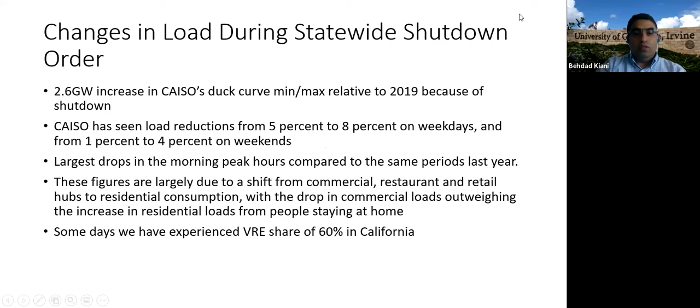And as I told you, it goes up to some days to 60%. So we might look at this in the future.

So today's presentation is about how we can actually provide sufficient seasonal storage to achieve a 100% zero carbon electricity grid, which is our 2045 goal in California. And what would be the potential role of hydrogen infrastructure in a BEV-FCV combination for a sustainable path towards a zero emission energy system? And what could be the role of hydrogen infrastructure in seasonal storage for balancing variable renewable energy generation and vehicle hydrogen demand year-round?

So what I have been developing up to now was a model, I call it CALZEEV because we call it a California Zero Emission Energy System and Vehicle. At an early stage, it was only a Cal EV model because we were looking at only the EV vehicles, BEVs. But later we added ZEVs, that means all the hydrogen FCV vehicles and BEVs. And another E in the middle, that's an energy system, because we are adding different sectors of the economy, not only the transportation sector, but also going up to industry and other sectors.

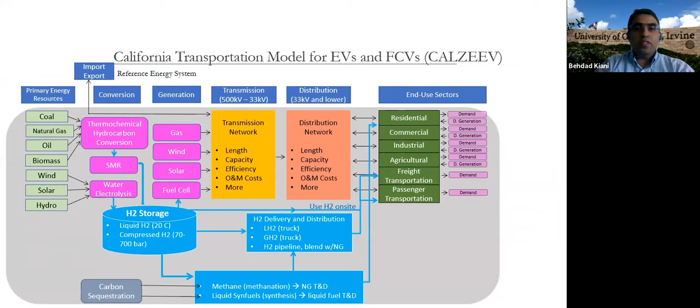So this is a typical reference energy system for the model. You see that we can look at the energy chain from the supply, all the way from the resources to the generation, power plants going into the transmission network, and from the transmission to distribution, and from distribution to the end use sectors. Now, at the end use sectors, which you see in green, MESSAGE is designed so that we can look into the demand, and that's hourly demand of useful energy.

That means for transportation, the service we need is the VMT, the hourly VMT we need for each region for people to travel. And if it's residential, it could be heat demand or cooling demand. And if it's industrial, the demand for heating or direct reduction for steel and iron. So it looks at how much energy you need, and it tries to provide that energy through all these technologies from end use sectors to the conversion level.

And beside the electricity system, below in blue is the hydrogen infrastructure. So if we have electrolysis-made hydrogen from renewables or from the grid, it goes into a storage tank and is delivered to distribution for fuel stations, or goes to the industry sector to provide hydrogen for steel, which we added in this model. And I will explain this model further when we show the results.

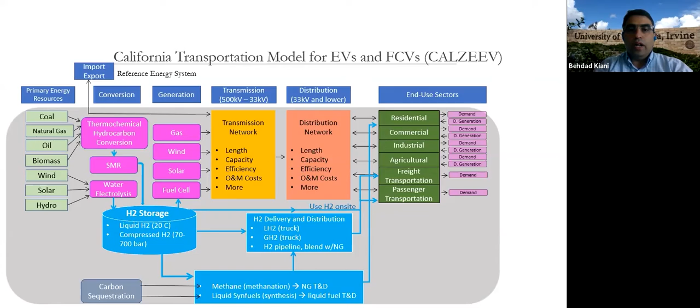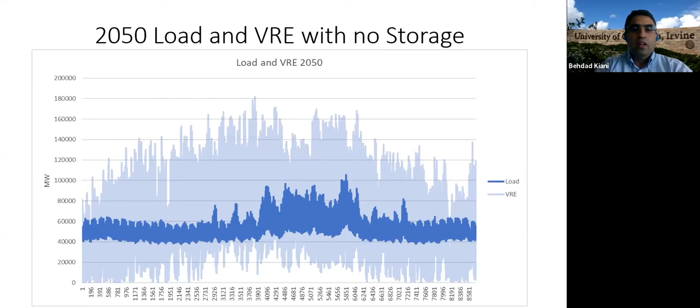So here is a sample simulation for 2050. It's just a simulation where we had enough variable renewable energy, that's solar and wind, that the total energy in a year equals the total demand for that year. This is what it would look like in 2050 with all the intermittency that we see in this figure. And if I open some days for you, you see that the VRE and load really mismatch at different times of the year, especially summer and winter.

So for the 100-something hours of the simulation in summer, you see that the orange is the VRE and the blue is the load, but the total VRE is much more than the load that we need. But in the winter, for a few days, you can see that orange is much lower than the load. So what you need is to take all that excess renewable energy from summer and carry it all the way to the winter times when you lack renewable energy.

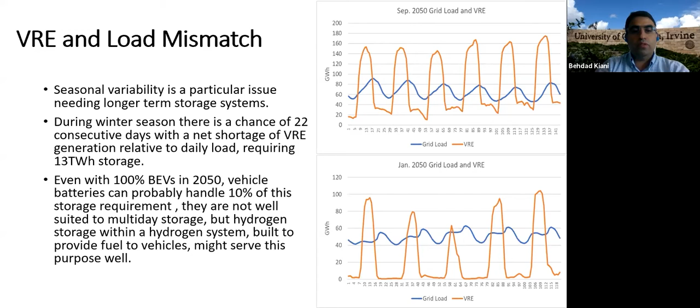And with a simple simulation, you can see that you might have even 22 consecutive days of net shortage of VRE in this case. That would be about 13 terawatt hours of storage needed only for these days. And even if 100% of your vehicles in California are BEVs, that's about 28 million vehicles, and you use their batteries for grid interaction, this would probably only handle 10% of the storage requirement. So they are not well suited for multi-day storage, but hydrogen storage with a hydrogen system built to provide fuel to vehicles might serve this purpose very well. So that's why we added the hydrogen infrastructure to our all-BEV scenarios.

So our main goal and objective is to add all the sectors, although we haven't gone through all of them, residential and commercial. But for now, we added the industry sector beside the transportation sector, to study the detailed hydrogen infrastructure for the 5 regions in California based on transportation energy demand for each region. But I have to mention that for now I had some CPU limitations, so I ran the model with fewer regions.

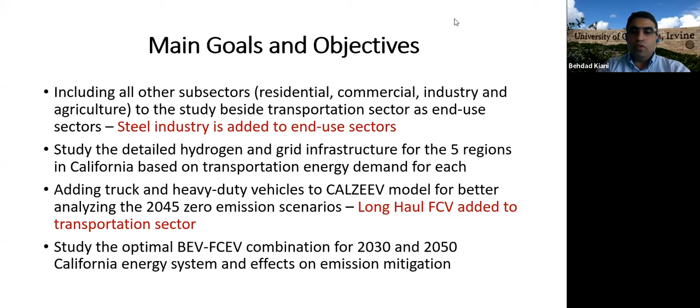And then adding trucks and heavy duty vehicles to the CALZEEV model for better analyzing the 2045 zero emission scenario. So for this purpose, beside the FCV LDVs and BEV LDVs, I added long haul FCVs and long haul BEVs as well to the transportation sector. And I went through different scenarios of BEV and FCV combinations, specifically for 2045 for this presentation. So this is a model development for 2045.

What did you do for the demand for 2045, for example? So for demand for 2045, I have the demand for the transportation sector based on my scenarios. I have 3 scenarios here, 100% BEV or 100% FCV fleet, or 50-50 as a mid scenario. So when I want to find a load for 2045, I have some information about the load I need for my BEV fleet and FCV fleet, if any.

And then I have other loads, not including BEV charging, but including other sectors of the economy. That's based on the CEC forecast up to 2030, extended to 2045 for other sectors of the economy. So I have some other load in my simulations that represents those. And I have my own fleet and VMT that provides me an endogenous final energy hourly load that I need for my BEV charging.

So yeah, California electricity grid, we went to 90% of VRE for 2045 for now. I'll explain why 100% would be more challenging, because it's more important to see how we want to go from 90 to 100% and keep the prices as economically optimum as possible.

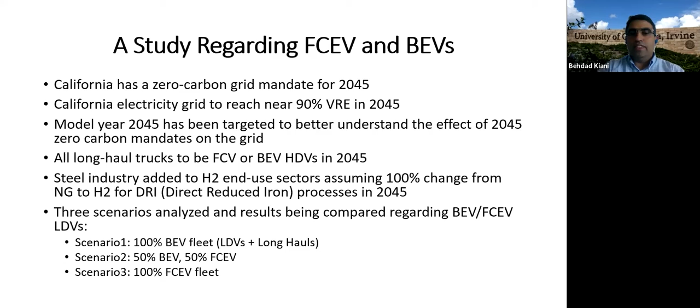So adding new sectors, the long haul trucks, how I incorporated this sector into the model. My assumption was based on simulations done by other groups, like 250,000 FCV long haul trucks in 2045. Assuming each long haul truck goes 100,000 VMT per year, has a 60 kilogram hydrogen tank, and that in 2045 I can achieve 11.3 miles per kilogram hydrogen fuel efficiency for my long hauls. And the steel industry consumption is 3 million tons per year that we use for the hydrogen consumption.

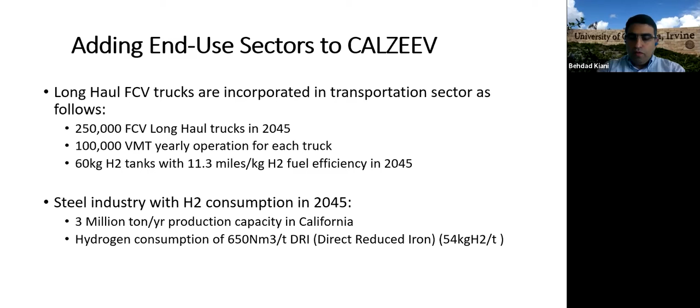For DRI, 54 kilograms of hydrogen are required for each ton of steel production. I added this to the demand sector. On the right hand, you can see I added the long haul trucks, the BEVs, the FCV light duty, and in the upper right corner is the steel industry, which were all added to the demand side of the model, and I had hourly demand for that.

One thing that the model can give you as an endogenous variable is the shadow prices. It is a demand-driven optimization model, and it looks at the total cost of the energy system, calculating the present value of the cost of all the technologies that can be installed in future periods as well. That means if we want to install hydrogen storage, a hydrogen pipeline, or a hydrogen fuel station, or on the electric side fast chargers, it takes all the information such as capital cost, fixed operation and maintenance cost, variable O&M cost, plant factor, lifetime of the plants, efficiency, and so on.

So it provides, based on the demand, how much should be installed in each year or each period, and within 8760 hours, how it's optimizing the activity of the technologies. So potentially this is a tremendous amount of data. Where did you get all this information, especially information that pertains to the technical characteristics of each plant?

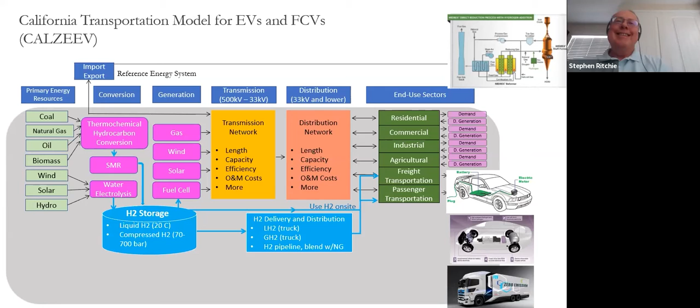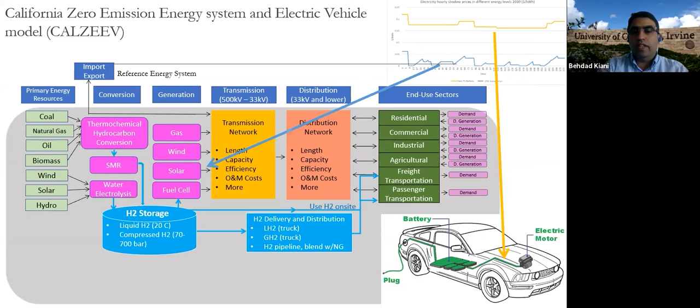Okay, so what is the actual output of the model? So the actual output of the model, I'm just going to go to it. Okay, sorry. Yeah, one of the outputs is the price, it's a shadow price. You can get the average shadow price for each part of the energy system. So this is a sample output for each hour. You can get it from the output of variable renewable energy, solar and wind, or you can get it from inside the car, where the electricity is going after being charged from the battery to the motor. So it's very flexible how you design a model, how much you go inside each technology, and for each part of that model, you can get the shadow price.

Another thing is that I added the electrolysis plants, so the model can decide if it's going to get it from VRE only, which is green hydrogen, or from the gas power plant to the grid and grid to hydrogen, which is including the VRE up to 90%. And this is like gray hydrogen, but if we add carbon capture and sequestration to the gas power plant, it would become blue hydrogen. So because it's a 90% grid, I showed it as blue, but that's something else that we are going to add to the model.

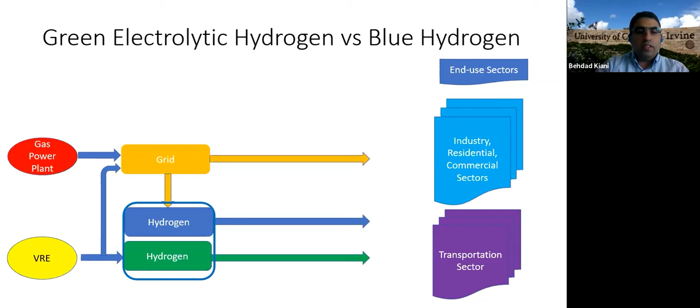So I showed you these curves, and I want to show you some results as Steve asked me. Some of the results are how much capacity is needed for each technology. When I say technology, it's not only the power plants, it's all the technology within the energy levels of that picture I showed you. That means the storage tank, the pipeline, the electrolysis plants, the fast chargers on the demand side, or how much capacity we need for hydrogen fuel stations to provide the H2 dispensing capacity needed for all those VMT FCVs that would be available for 2045.

So the output of the model is many things. First, how much optimum capacity of each technology we need, and beside that, I'm showing the hourly output as well. Prices are an endogenous hourly output, but I'll show you in the next slides how I go into the hourly production of the thermal plants and how much is actually produced by electrolysis plants and so on. So in this scenario, that is a 50-50 FCV BEV scenario for 2045.

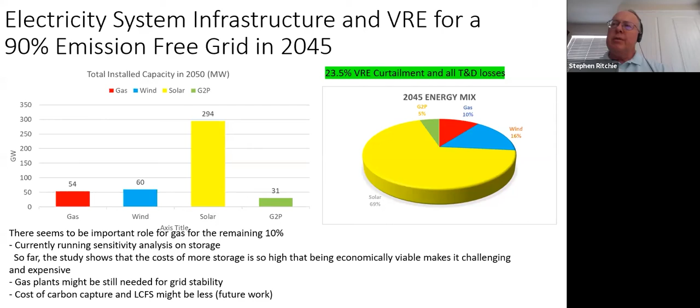So, Behdad, when you talk about transmission and distribution, you've got one huge region for Northern California. Is it essentially aggregated into a single representation for that whole region? So we have distributed the regions. If I go back to the first one, I have shown on the lines, it's very small, what the capacities are for the lines between big regions. It might be about 3 gigawatt capacity.

So when I say I have 62 gigawatts of peak load, that 62 gigawatts is actually distributed between these capacity lines, and could be like 24 gigawatts between two regions, 10 gigawatts between other two regions. But with the peak load, you might have in total a peak load of 64 gigawatts for 2017.

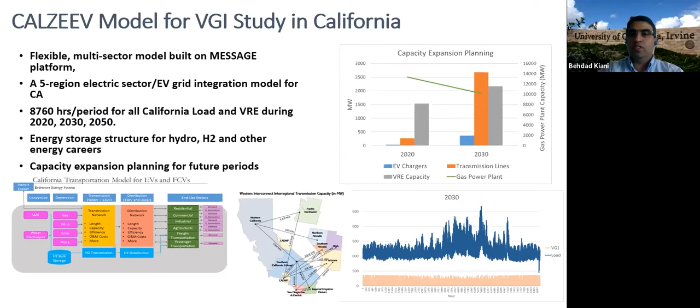That's how I'm actually now modeling, but going into more detail gives me more precise information regarding the transmission and distribution, of course. Okay. So maybe this is what you're looking at in the future, but that huge Northern California region has a number of cities, right? It's got the Bay Area, Sacramento, and some smaller but still significant sized cities, maybe Central Valley. Is it practical? Maybe it's a computational question, but is it practical to disaggregate that region further, maybe by urban, rural, and the larger cities, or does it just blow up the CPU time?

Well, I think we have to look at what our goal is for each one. This is a very aggregated run for the whole 5 regions as one. But if I want to go into one region and look inside that, then maybe I can divide that single region into another 10 regions and run it for that region, and run the whole 5 regions in a model like this. I see. There are things that we have to look at. I mean, it's CPU time, the computer and the limitations. If you want to have all the 8760 hours and all those technologies, hydrogen and electricity grid, and all those subsectors, there are some CPU and hardware limitations that we want to avoid.

I know that there are some models like Energy Pathways, E3. They are not looking at 8760, but they're looking at 24 hours for each month. So they have 24 times 12 time slices for each year. That enhances the computing time, but that limits how we look at the real thing in the future, the wind and solar and charging BEVs for the 8760, looking at all the capacity to be installed in a year. They wouldn't be able to show that as detailed as we are able to show it like this. I see. And so what's the runtime of the model roughly at the moment for the state?

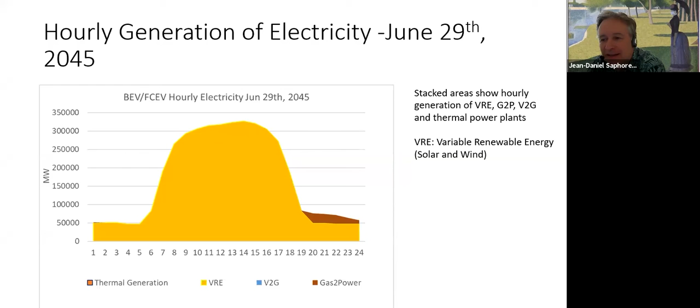Yeah, of course, the quality enhances. You can get more specific, more quality results for each distributed region within each city, or how the power plants. But for now, I'm looking at the whole California ISO CAISO grid and what would be the effect of power plants on the grid, right? So I didn't go into the details for that reason. I thought it wouldn't be necessary for the purpose of looking at the transportation sector specifically and how they can affect the grid. Thank you.

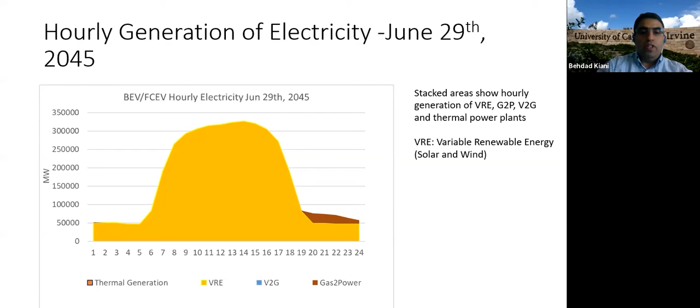You're welcome. So a typical day that I have figured out for 2045 is June 29th. This is the VRE production in that day. And dark brown is the gas to power, which the model has chosen. There's no thermal generation in that day, and there's no V2G required. The stacked bars are the load in that day. Now, you see a lot of solar is wasted and curtailed.

The reason is because there's a trade-off between how much hydrogen infrastructure you want to install to avoid curtailment because of the cheap solar you have in that year. So the model has decided to install a certain, specific amount of storage and pipeline, but to curtail this much of solar energy to keep the costs as low as possible. So that's up to 90% VRE in the grid.

The grid load is shown on the lower level. The red part is the electrolysis from grid, and dark blue is the electrolysis directly from VRE, which is green hydrogen. And you see there is some grid to vehicles also, getting electricity from grid to charge the vehicles.

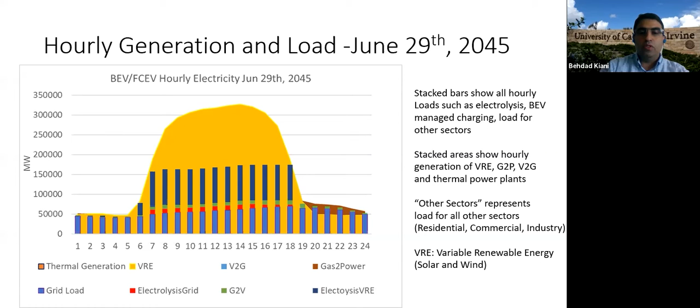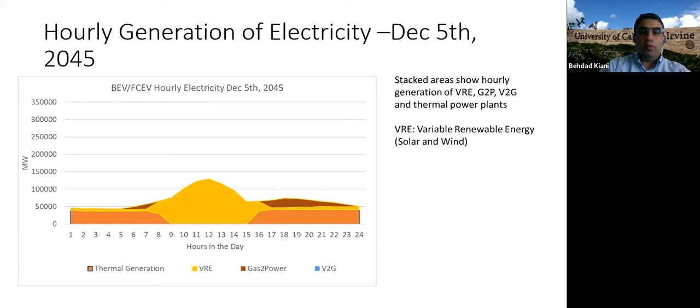Another day is a winter day. We have much less solar, so we need to have some thermal generation. Although we had hydrogen storage and infrastructure and G2P, it's cheaper to have the thermal generation, like gas power plants. And on top of it, we have some gas to power, but not all of it.

You know, I have another quick question for you. Yes. So you split California into several regions, right? Are you modeling the fact that we are part of the Western grid and that we can export some of the extra power we are generating to other parts of the Western grid that may actually need it? Because we are a couple of hours behind some other parts of the Western grid. So it may be dark there, we have a lot of sun, we can send them power, right? Or in this exercise, this is not done at this point.

Yeah, exactly. That's a very good question. Actually, I was looking at that when I was doing work at British Columbia, and we were looking at the WECC region and how we can use the time difference in utilizing the storage. That's a very good thing to add to the model in the future steps. But now, no, I didn't include that time difference and the export opportunities that we would have.

You know, likewise for imports, right? We could import power when needed. So that's the whole reason for being interconnected. Exactly. So the model can choose the import based on the price of electricity or even hydrogen. And for the export, you have to expand your region to include the WECC regions to see how it actually trades the energy between the regions. Thank you. You're welcome.

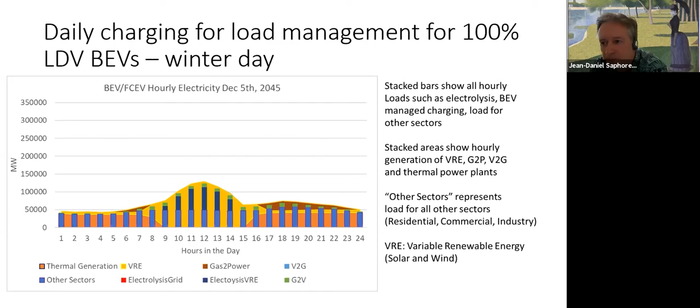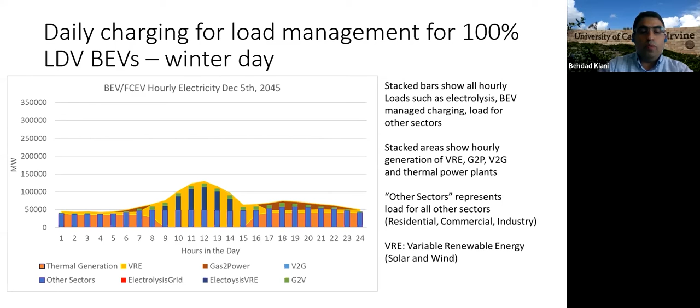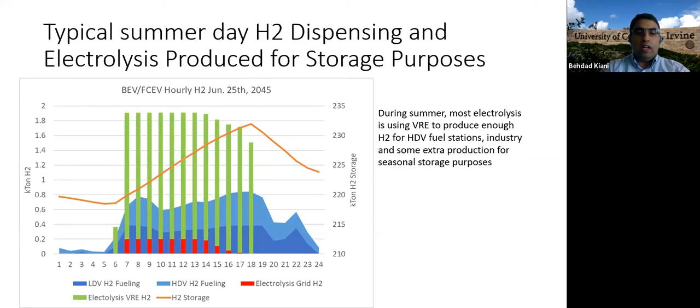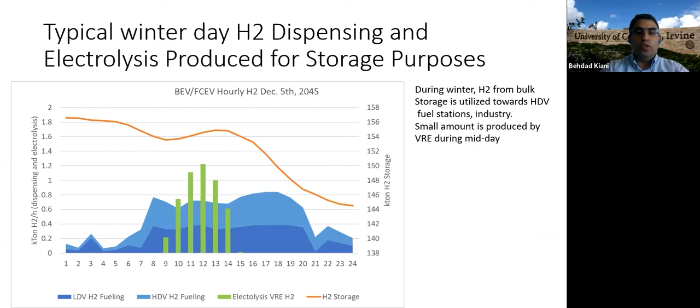If you see, we are producing much more electrolysis than we require in a day, but the excess electrolysis is going into the hydrogen tank to be stored during the summer, so that we would actually be using that hydrogen during the winter. So the orange line is the level of hydrogen stored in the tanks that is being utilized during the winter time, a typical day in the winter. Because we are making much less electrolysis during that day because of less VRE, we are providing the hydrogen from the hydrogen stored during the summer.

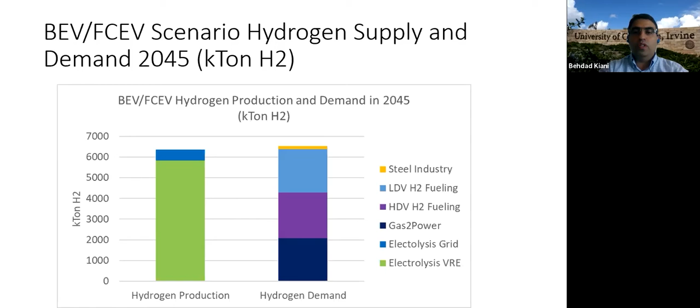So this is the balance between the hydrogen production and hydrogen demand during the BEV FCEV scenario. On the left side, you see hydrogen production, how much green hydrogen electrolysis is produced, and how much is produced from the grid. The right-hand side is how much hydrogen is used to produce electricity by gas to power technology, to fuel the HDV vehicles, to fuel the LDV vehicles, and how much is going to the steel industry, which is very low for now.

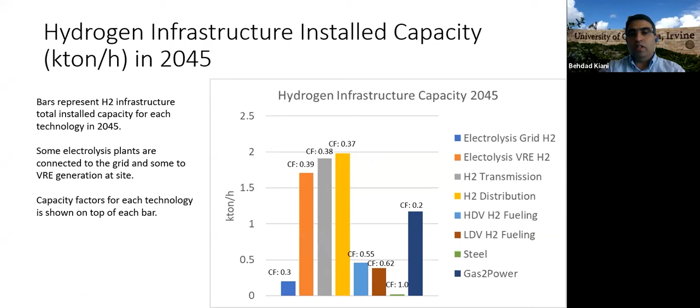And this curve is showing the infrastructure needed to be installed and the respective capacity factors that are endogenously produced by the model. So the model is saying for each hour, how much hydrogen should be produced through the plants, how much of this hydrogen is going into the pipelines, to the tank, how much is distributed from the tank to the fuel stations or the steel industry or the gas to power, and how many gas to power plants we want to install. And it's all given as an output by the model.

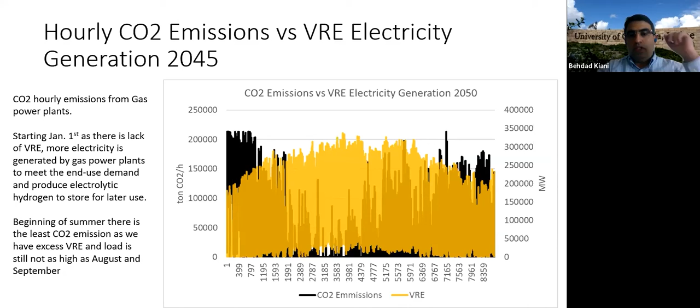This is another output of the model. It's showing the CO2 emissions per hour from the thermal plants during the year. The first day of the year is the first day of January. So during the winter, you need to have more production of hydrogen to actually support your hydrogen needs. And it's comparing it to the VRE. As you see, when there's more VRE, you need less thermal generation.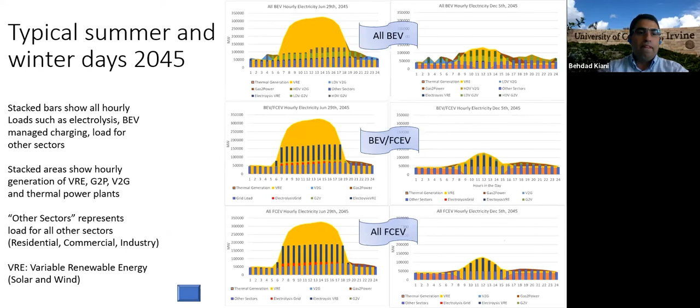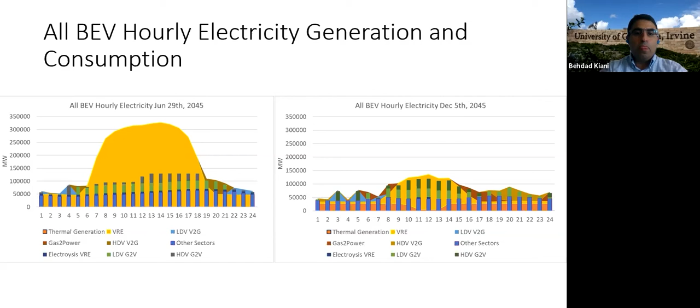So if you want to compare the three scenarios, all BEV, BEV FCV, and all FCV, you would get some interesting results. For example, for an all BEV scenario, I'm showing you only this one as we don't have much time left. We see that although during the summer you have a lot of curtailment, during the winter it's actually helping to sell the electricity from V2G, from the batteries of the vehicles to the grid. At a later time of the day, other types of vehicles, like light duty, are selling it, and at other times of the day, the heavy duty are using it from the grid. So the batteries are being utilized on a daily basis as a storage device because of the V2G possibility.

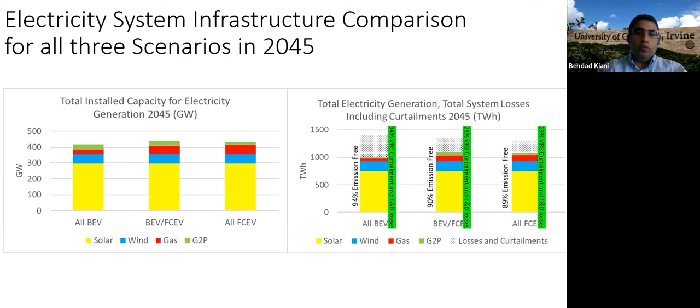And that can happen in any scenario, but the main thing, if you compare it, you see that the more you go towards FCV, the less curtailment and losses you have on the whole energy system for electricity, of course. So if you have an 89% emission-free grid, I'm looking at the far right-hand side of the graph, which is all FCV, you would achieve 19% VRE curtailment and T&D loss in that grid. But if you have the all BEV scenario, you might go up to 34% of VRE curtailment and T&D losses, but keeping in mind that you might be able to go to a 94% emission-free grid. And in between, you are at 23% VRE curtailment and T&D losses altogether. So it's important to compare the scenarios and figure out how it affects the grid.

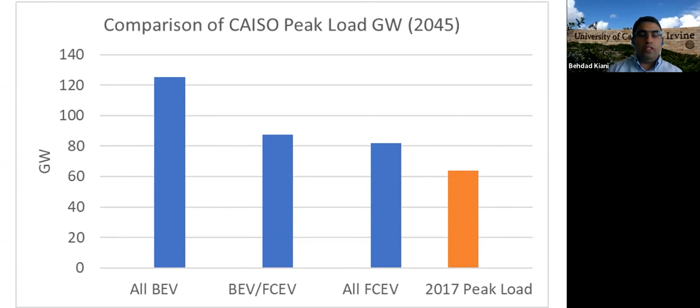Like for the all BEV scenario, it's very normal that it shows you have to install more transmission lines, probably because your load goes higher during peak hours. That's the total load in the total grid in CAISO. Right now it's 64 gigawatts, but it might go as high as 120. For this reason, you might need to install more capacity expansion, transmission lines between the regions. For BEV FCV, something in between, and for all FCV, fewer transmission lines, comparing to the peak load of 2017.

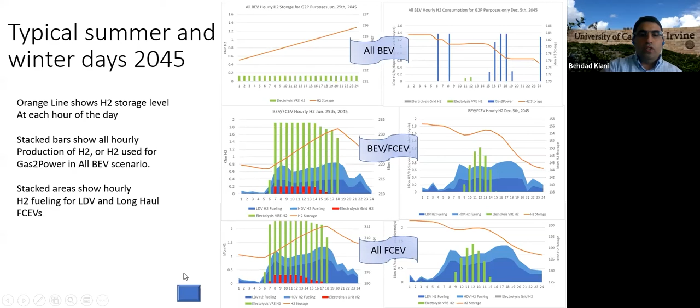Now, if I want to compare all BEV, BEV FCV, and all FCV for the hydrogen infrastructure, for all BEV, as you know, we don't have any FCV, so you don't need any fuel stations for hydrogen. What's happening is that you're only producing hydrogen by electrolysis going to the hydrogen tank, and during the winter time, the hydrogen is going into gas to power and producing electricity only during specific hours of the day, which is the peak time you need electricity. For BEV FCV, you need to provide hydrogen for your fleet as well. For all FCV, you're providing mostly for your fleet and a small part for your grid.

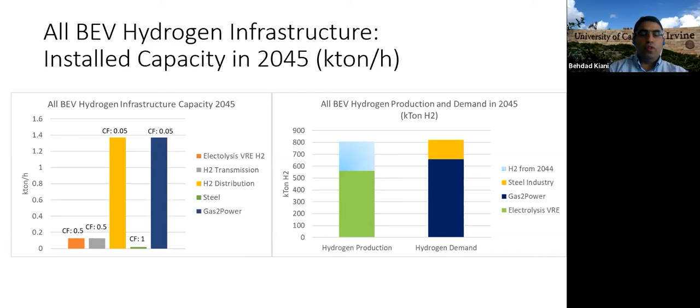So here I'm comparing actually all BEV hydrogen infrastructure installed capacity. As you know, I compared before for the electricity part, but this is for the electrolysis part. And if I compare it for a BEV FCV scenario, we have better capacity factors within our installed capacity. And if you add the capacity factor for the electrolysis plant, you can go as high as 70% capacity factor when you have an electrolysis plant that is connected both to the grid and directly to the VRE plants.

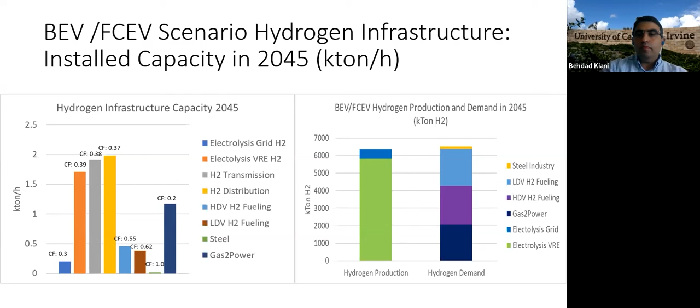And this is a very integrated system. That means when I say an all BEV scenario, that doesn't mean I don't have hydrogen. That means I'm producing part of my grid by gas to power, which is expensive. And because I want to go to a 90% or above grid, right? So it's not only calculating the cost of the fuel of the cars, but calculating all the costs to achieve a 90% grid.

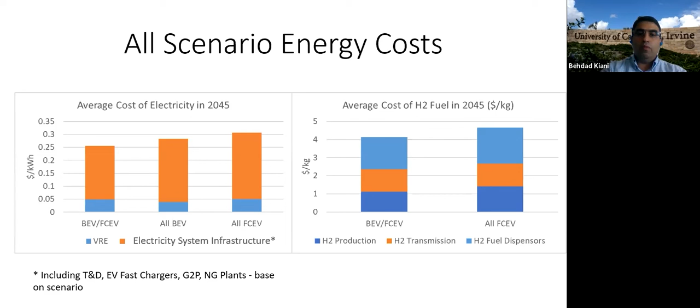So for the future work, I'm looking at improving the LDV and HDV transportation sector, total cost and charging behavior, adding carbon capture and sequestration to the gas power plant towards an emission-free grid, and completing the run to include all 5 major regions with a more detailed spatial model. As you also mentioned, it's important to go into these regions, and add time periods to be able to understand interim policies, add the LCFS current H2 credit and a possible optimum LCFS policy,

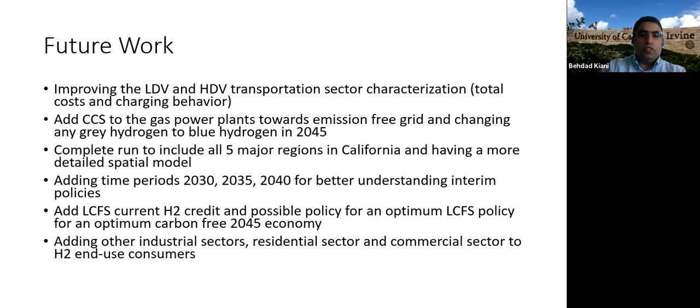which is possible with this model configuration that I have in hand, and adding other industrial sectors like cement, which is a very high intensive industry if you want to add hydrogen to it, the residential sector, commercial sector, and H2 end use consumers, to be able to look at the hydrogen infrastructure in much more detail and with higher capacity factors. So thank you very much, and I would be happy to answer any remaining questions.

Okay, I'll jump in. This seems like a very complex model. How does one validate a model like this, Behdad? I mean, is it even possible to do any sort of validation? How do you know? Yes, the way that we validate a complex model is by sensitivity analysis of the scenario. So the best way is to change the parameters, see how it behaves, how the outputs change, and if it's rational, and the outputs and the differences are compared.

We can almost rely on it, and we can compare with some other studies, but I don't think I have seen a detailed study that looks into the energy system this way as I've done. There are studies looking at the supply chains, or some studies on the demand side, but not going all the way through the generation as a whole integrated system, like 8760 hours in one run. So yeah, this is something that I wanted to discover, and the advantages I thought it would bring for us.